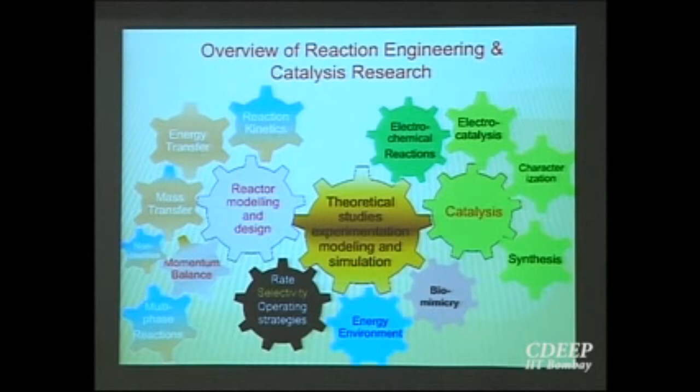So what we will do next is we will quickly go through the dominant themes which are being tackled here, and maybe also pick some examples from elsewhere, and then look at the approach to reaction engineering and catalysis research that is usually followed, and especially so in our department.

So there are homogeneous systems and liquid-liquid systems, and when you consider homogeneous systems, I must mention one thing, that reaction engineering, while I said that it is a unique preserve of chemical engineers and so on and so forth, is often considered as a very mature field because it's been around for hundreds of years, and the basic theory is reasonably well developed, and it only remains to apply that theory to particular cases. Okay, so this is one point of view.

But as we go along, we will see that although in terms of principles there is a certain amount of maturity in the field, there are a lot of unsolved issues when you apply it to specific cases, and therefore the issue does get quite complicated, and there is a lot of research material in this field yet. Okay, for example, even if you take a simple thing like a homogeneous reaction, the situation today is that as far as gas phase reactions are concerned, the understanding is reasonably good, and you also have theoretical tools like density functional theory and so on, which are reasonably successful in predicting the course of reactions, gas phase reactions, simple reactions which do not have a complicated mechanism and so forth.

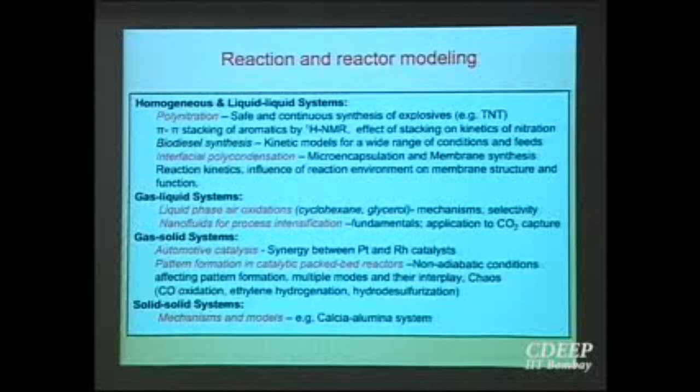I will talk about some of our own work on interfacial polycondensation, which is a reaction that I had occasion to mention the other day when Professor Juvekar gave his lecture on interfaces and interfacial engineering. This is a polymerization reaction. It's a condensation polymerization or a step polymerization reaction that takes place at the interface between two liquid phases. Hence, it is categorized under liquid-liquid systems.

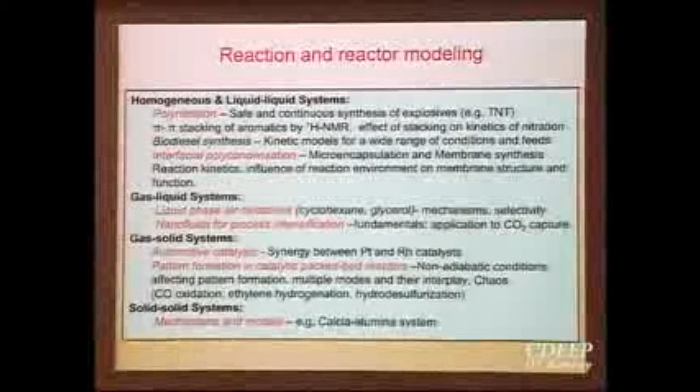And what happens is that each of the liquid phases has one of the monomers. Therefore, the reaction does not occur in the bulk of either phase. The only place where the two monomers can come together and react is the interface, and the reaction product in turn is also insoluble in both the phases. Therefore, it forms a film at the interface, and this spontaneous formation of the film is convenient in producing products such as microcapsules of, let's say, enzymes or pesticides or herbicides.

So the intention might be to contain the product encapsulated, or it may be to release the encapsulated substance to the environment in a controlled and sustained manner. So for either of these situations, you might want to produce capsules, and because you can conduct this reaction at the surface of drops, you'll get the capsules directly. So that is one advantage of these reactions.

The reaction is also used in producing membranes for separation applications, such as reverse osmosis membranes. The dominant type of reverse osmosis membrane chemistry is about polyamides, and the polyamide is formed by this kind of a reaction. It forms a very thin layer, which is a few hundred angstroms thick, on top of a support membrane, and so interfacial polycondensation is the reaction at play here.

So here our interest has been, both in the context of microencapsulation and membrane synthesis, to measure reaction kinetics, which is a problem because the reaction is extremely fast. It is finished in a matter of seconds. So how to monitor these reaction kinetics, and why is it important to measure them? If it is so fast, then why are we worried about it?

It is because kinetics can be influenced by the reaction environment, and kinetics through the reaction environment can influence the membrane structure, and once the membrane structure is influenced, it influences the functional properties such as permeation rate or mechanical strength of these membranes. So these are the issues that we are interested in.

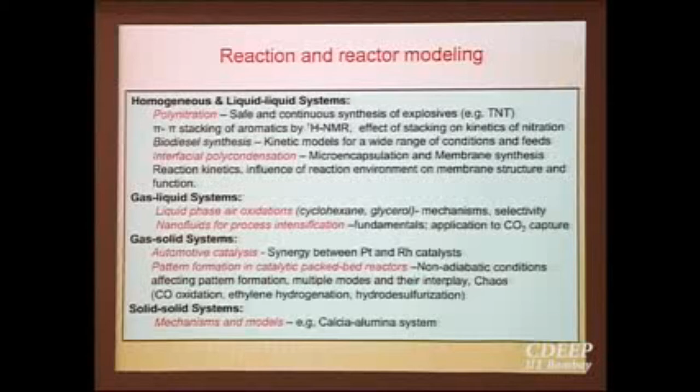Coming to a fourth kind of multi-phase reaction system in which work is going on here, we are investigating certain features of solid-solid reactions. The way in which reactions occur when at least one of the reactants is continuously distributed, such as when one of the reactants is a fluid phase, gas or liquid, is easy to understand, because the molecules are moving about, and in the course of that movement they will find a molecule of the other substance, which may be in the same phase or a different phase, and a reaction will occur. How do reactions occur when both reactants are solids?

There are a number of these kinds of reactions that take place in, for example, the ceramic industry, or even in chemical industries such as cement manufacture, right? So where both the reactants are solids.

So we are trying to look at how these reactions can be analyzed from a macroscopic angle, without worrying too much about how actually molecules move and diffuse and so on and so forth. Can we understand some broad characteristics of these kinds of reactions from a top level kind of an approach? So the candidate systems we are looking at here are calcia-alumina systems, which, as I will explain, have some interesting features for these kinds of applications of theories.

Continuing on the theme of multi-phase reactions, the reaction and reactor modeling uses various kinds of approaches these days. The emergence of this field called computational fluid dynamics modeling has helped the understanding of multi-phase reactions, particularly when you have fluid phases involved, to a great extent. And that is because in any chemical reactor, one of the major ways in which the reaction environment or the reactor influences the behavior of the reaction itself, right, is because of the way in which substances mix, the rate at which substances mix and unmix. And all of this can be analyzed very neatly using computational fluid dynamics tools.

Some years ago, maybe 20-30 years ago, it was very difficult to analyze these kinds of mixing phenomena because, number one, the fluid mechanics equations, the Navier-Stokes equations, which have to be solved, are very, very complicated, nonlinear, and all of that. And added to that, they have to be solved in very complicated geometries. If you take a stirred tank reactor, there is a stirrer and there are baffles, there is the gas inlet, and there is the free surface which itself is not flat, and so on and so forth. So there are a lot of complications in the geometry which have to be handled, and thanks to the advances in computational tools and computational power, we are now able to solve these equations, not exactly, but under some assumptions.

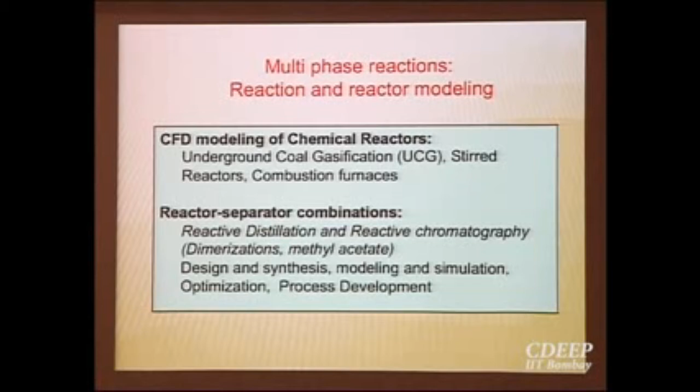Coming to catalysis research, the kind of questions that we ask is, what determines catalyst activity and selectivity? Of course, as I mentioned, there is density functional theory, which tries to explain these from very fundamental quantum mechanical kind of principles, but those kinds of calculations are very complicated, especially for dense systems such as liquids. So we might want to take an experimental route to finding out what makes for a high activity and selectivity of the catalyst. One of the themes that has been emerging in recent years is that the catalyst cluster size has a substantial influence on the catalytic properties of the catalytic substance. For example, till recently gold was not considered a good catalyst.

Gold was considered an inert metal, but recent advances have shown that when you subdivide gold to nanometer clusters, it has very interesting catalytic properties, very selective kind of properties for a number of reaction systems.

So catalyst cluster size effects. And once you have a catalyst, you cannot rest easy that I have found this catalyst and now I can conduct my reaction and make a lot of money, because in order to use this, you have to support the catalyst on some kind of a support which has a high surface area. Silica and alumina you might have seen being used as supports in a number of instances.

The second thing is what influences catalytic reaction pathways. Now this is a very complicated matter, because there are reactions taking place on the catalyst surface, there are reactions taking place in the bulk of the fluid, and each of these, by generating certain kinds of intermediates and consuming them, can influence the other. And so these kinds of external influences, or the influence of other catalysts, whether intentionally added or accidental, become important. And reactive intermediates and their stabilization. So this is basically related to the earlier question of what determines catalytic activity.

Then how do we model catalytic systems? In your reaction engineering courses, you might have come across very simple kinds of models where, whether there is a catalyst or not, you apply power law kinetics, K times Ca to the power alpha, Cb to the power beta type of thing, where the catalyst only influences the magnitude and temperature dependence of the reaction rate constant, K. That is the first level of modeling.

If you want to go deeper, you can derive or postulate a Langmuir-Hinshelwood kind of a mechanism. You can say that the catalyst first complexes with reactant A, produces an active species, which then reacts with another surface species or a species in the bulk, and so on and so forth. You can construct a series of steps and analyze them with the assumption of one of the steps being rate limiting, or the system being in a quasi steady state, and so on.

A more detailed level of modeling is what is called microkinetic modeling, where you talk about all the surface species that are possible, that are suggested by chemistry, and you don't make assumptions like quasi steady state or rate limiting reactions, and so on. You analyze the entire network, but obviously when you do this, there is a horrendous number of rate constants and their activation energies, which if they are not known, there is no point in building such a detailed model, because everything has to be fitted from reaction data.

But fortunately, because of the availability of quantum mechanical calculations these days, at least in some instances, we are able to guess reasonable values of some of these parameters. Therefore, microkinetic modeling becomes feasible. And if we can do all of this in a systematic way, then that can point the way towards efficient catalyst design. The candidate systems in which we look at these kinds of questions are liquid phase oxidations, biodiesel, and so on and so forth.

The third or the fourth area that we look at is the area of, I have grouped a few themes here: complex phenomena, biomimicry, and electrochemical processes. They are all complex in one sense or another, so they all fit under one heading.

When we talk about complex phenomena, this is usually generated in chemical reaction systems because of the nonlinearity of the systems. Nonlinearity arises in two ways: because of the nonlinearity of the kinetics, the nonlinear ways in which the reactions depend on reactant concentrations and product concentrations. After all, first order reactions are more the exception than the rule, right? First orders are the only reactions which are linear.

On the other hand, there is also the nonlinearity that is due to the Arrhenius dependence of reaction rates on temperature. When these kinds of nonlinearities exist, the equations predict that very interesting kinds of behavior from a theoretical viewpoint can arise. From a practical viewpoint also, these are important, because when the system is exhibiting these kinds of behavior, it might show entirely different kinds of selectivity features and rate features, which may be important from a practical point of view.

So we are looking at some of these systems, and as I mentioned earlier, there is a tendency these days to look at biology when we are stuck for an answer, right? After all, nature has been at it for millions of years, and it has found things that we are still struggling to learn. Therefore, modeling biological networks in order to understand how signaling takes place, how control of reaction pathways happens there, how the very complicated networks are regulated and conducted in a very coherent manner. So these are important issues that we can learn from nature.

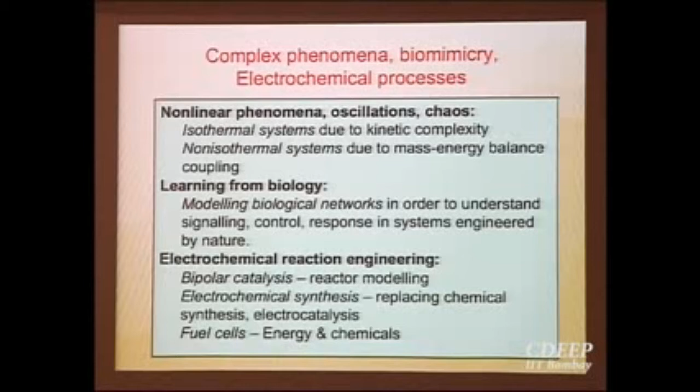Electrochemical reaction engineering, I mentioned that it's a very attractive alternative to heating the reaction mixture to a high temperature, for example, or finding a very efficient catalyst, because one of the ways in which you can tune reactions is to conduct them at a certain definite potential, so you can drive certain reactions while leaving the other reactions alone. So you can derive interesting selectivity features. I will talk a little bit about bipolar catalysis and electrochemical synthesis in the next few slides.

Okay, so in the next few slides I will try to illustrate the kind of approaches that we take in reaction engineering research on all of the themes that we went through in the earlier slides. Often, the research proceeds as in the case of, you might have heard the story of blind men trying to understand the shape of an elephant. One fellow touches the stomach of the elephant and he comes to a certain impression. One touches the legs and comes to a different impression.

What is important about this is that in the last 10 or 15 years, a lot of literature has accumulated which says that these nanofluids have properties which are very different, number one from the base fluid in which the nanoparticles are suspended, and number two from what is predicted by theories available for predicting the properties of suspensions from the properties of the individual components. So those theories don't seem to work. We observed this in the case of mass transfer, where we found that the mass transfer rates in suspensions are much higher as compared to the mass transfer rates in base solvents.

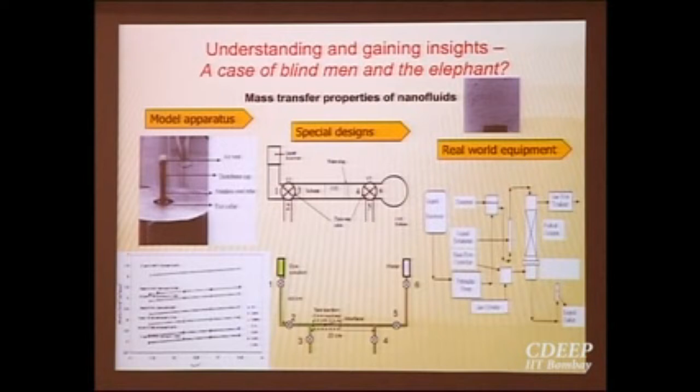The other factor that is important is the influence of scale at which you apply your reaction engineering principles. I talked about the influence of pi stack.

So I mentioned the occurrence of pi stacking in aromatic systems and how this influences the rates of a reaction such as nitration. What we are essentially saying is that when you have aromatic molecules, they can sit on top of one another, something like a polymerization, but this is what is called stacking, so that the pi electrons can move continuously across different molecules, and this confers some kind of stability.

Now aromatic molecules are stable because of the resonance stabilization of the bonding electrons, but this confers a higher degree of stability on the aromatic molecules, so they become even less reactive, so the rates of reaction are not very high. On the other hand, if you study the phenomenon carefully, there is a kinetics to the stacking. There is a rate at which the stacking takes place. Now if you can get the molecules to react before they stack up, maybe you can derive benefits in terms of rates.

That stacking is taking place can be analyzed in terms of proton NMR, as I said, and it also manifests itself in terms of large increases in solubility of the aromatic when the stacking phenomenon takes place. So how do we conduct a reaction? How do we mix the nitrating mixture with the aromatic faster than the stacking kinetics? We can do this in, for example, something like a stop flow reactor, and this is a micro reactor which allows us to do that.

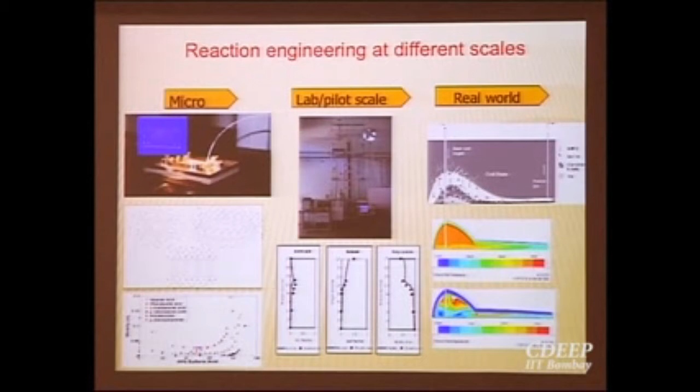Another issue that often becomes important is, while large scale manufacture is strongly dependent on steady state behavior of reactors, there are interesting kinds of dynamic behavior which might have important consequences on the operability or the safety of operation of these kinds of reactor systems.

So what is shown here is a continuous reactive distillation system, where of course there is a catalytic system that is responsible for the reaction and so on, but in the study overall, one is interested in the steady state behavior of this. But these kinds of catalytic packed beds have their own idiosyncrasies, have their own nonlinearities, which can affect the overall performance of the system in various ways.

So I have a video here from Professor Ganesh Viswanathan's work, which shows that in a catalytic packed bed, because of the nonlinear interaction between the mass balance and energy balance that occurs, you have patterns developing.

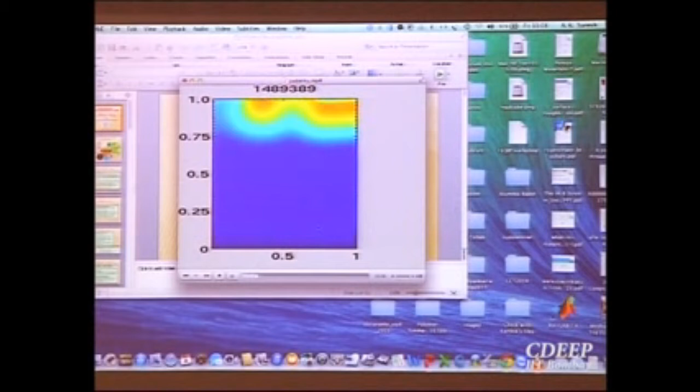So if you see that video, what is being shown here is a packed bed, in which the flow is in that direction from bottom to top, and what you see developing are hot temperature zones, hot zones, which travel through the reactor and exit. Of course, this is not something that you can poke thermometers all over the bed and measure. What you actually measure is the mixed cup concentration at the top, and that hides a lot of features.

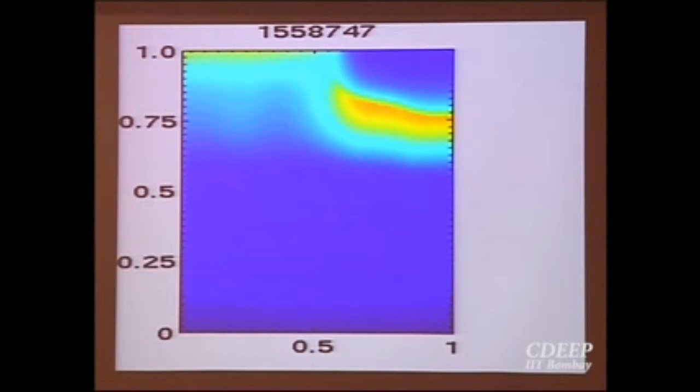Okay, there is a lot that is happening here. You may have hot zones developing in the interior of the reactor, which might sinter the catalyst, which might deactivate the catalyst, and so on and so forth. So the reactor will not give you the performance that you expect it to give.

So catalysis, in some sense, is the holy grail of reaction engineering. Everybody wants a catalyst that does wonders to your rate and selectivity. And as I mentioned a few slides ago, it is not something that we can design from first principles yet. Unfortunately, except in very simple cases, given a reaction, we are not able to immediately identify which element in the periodic table is best suited to catalyze that reaction.

We depend on earlier experience, knowledge that has been gained over the years for similar kinds of reactions and so on, and we shortlist a set of compounds, a set of materials, which we test and then narrow down the list of elements, and then there is the whole issue of supporting this and then making the catalyst in a form that can be used in an industrial reactor. Then there are the issues of support interactions and so on, right?

So catalyst synthesis is an important area which is very much of an art. Okay, you have to mix the ingredients in a certain manner under a certain set of conditions, and there are a lot of things that can happen which can have a significant influence on the catalytic activity.

For example, what is the size of the metallic clusters, how are they distributed, what is the porosity, what is the percentage of porosity that is hidden in micropores, which are nanometer size and which may pose diffusion limitations for the reactant molecules. All of these things are determined by the way in which the catalyst is synthesized.

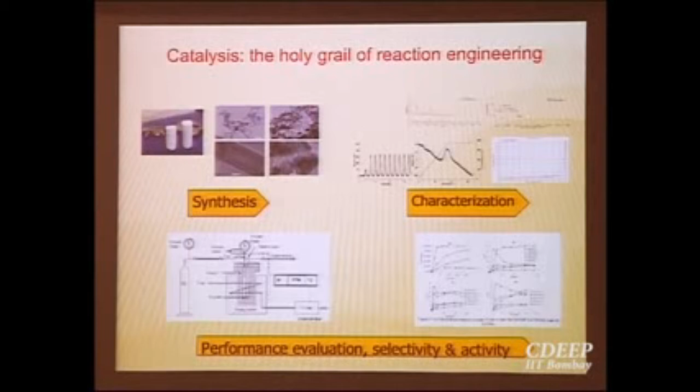So maybe I'll fast forward a bit. Okay, so I'll talk briefly about this, but more information you can ask from Professor Ganesh if you are interested, because this is part of his work.

So as I said, when we are confronted with even a simple network, it seems very complicated to us, but nature seems to carry on very complicated reactions in networks in the space of micronic dimensions of a cell very, very efficiently. So there's maybe a lot we can learn from how nature does this. Two particular instances of this from Professor Ganesh's work are illustrated here.

Now, often you want a switch-like response to a signal, right? So it's either on or off. That kind of a response is what is needed, not a gradual build-up of the response. Now this seems to be very characteristic of enzymatic cascades or biological systems, and earlier research has shown that stacking of these kinds of modules is what is behind these switch-like responses.

Now what is happening here is that there is an enzyme which phosphorylates a chemical X to its phosphorylated or active equivalent X star. X star can be regarded as the active form of X, and this X star itself is an enzyme which catalyzes the transformation of an inactive molecule Y to an active molecule Y star, and then the dephosphorylation or inactivation of these X star and Y star is catalyzed by other enzymes P1 and P2.

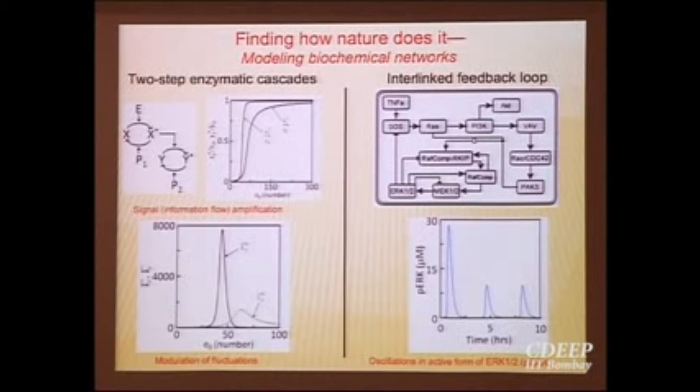Now, okay, I will not talk about this for want of time, but this is again an instance of interlinked feedback loops which deliver certain kinds of interesting features such as oscillatory phenomena and so on. I will skip this. Okay, the general theme I want to illustrate in the next couple of slides is that there are some very traditional themes that you would have come across in your reaction engineering courses also.

When rate processes take place in series, we know that the slowest rate controls, right? So we talk about the rate limiting step and so on. So a general theme that runs through much of reaction engineering is that of diffusion and reaction. Okay, so these may be taking place in parallel simultaneously, or diffusion may be followed by reaction or whatever, right?

Now this is a very old thing. There are results on diffusion reaction which date back maybe about 100 years or so. But even today you can come across instances of where this principle is at work. Okay, so that is why the quote there is from Macbeth. Some of you might recognize it.

So you would not normally expect such an old theme to have relevance even today, but then it has a lot of stuff in it. So we have seen in complex oxidations such as cyclohexane that under some circumstances where mass transfer starts to influence, this is a reaction in which the reaction gradually speeds up as the products accumulate. So there is an autocatalysis that is involved.

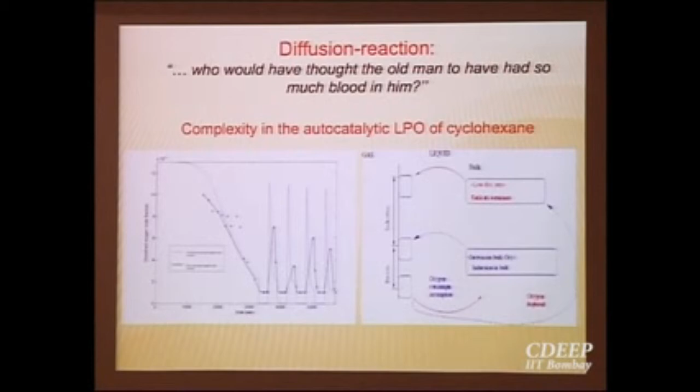Now this is an isothermal case, and there is no coupling between the energy balance and the mass balance that is invoked, for example, when you analyze the multiplicity of steady states and stability of steady states in a non-isothermal CSTR in your reaction engineering courses. So we try to understand this through a mechanism that invokes this paradigm of diffusion and reaction. Okay, so I will not go into the details, but it shows the relevance of some of the traditional themes in present day instances.

I'll just give one example of a situation which is very common in industry, but on which not much theoretical work exists. This is a case where both of the reactants are solids. Normally, you know the situation where a solid particle is surrounded by a gaseous or a liquid reactant. So you have the shrinking core type of models, where you could have gas film controlled situations, reaction controlled situations, ash film controlled situations. You would have seen all that.

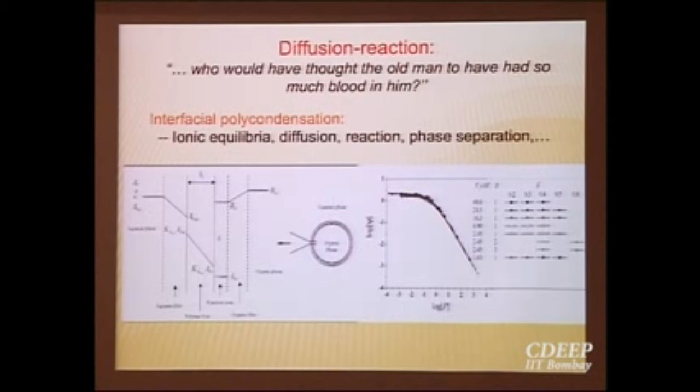So we'll skip this. How much time do I have? Another 5 minutes. Okay, so we'll skip this.

Yeah, so I mentioned electrochemistry. Under several circumstances, mixing electricity and chemistry could have advantages, because you can tune reactions by controlling the potential and drive certain reactions to the detriment of other reactions, improve selectivity, and so on. There are also devices like fuel cells for generation of electricity and batteries for storage of electricity, which are very important in today's context. And we are also looking at electrosynthesis and electrooxidation.

Now one of the themes that Professor Arindam Sarkar's group looks at is oxidation chemistry in a fuel cell: you take a substance and oxidize it all the way to carbon dioxide, and in the process generate some electricity. Instead of oxidizing it all the way to carbon dioxide, can you partially oxidize it so that you get some electricity but also valuable chemicals? So simultaneous synthesis of energy and chemicals is a theme that is being studied here.

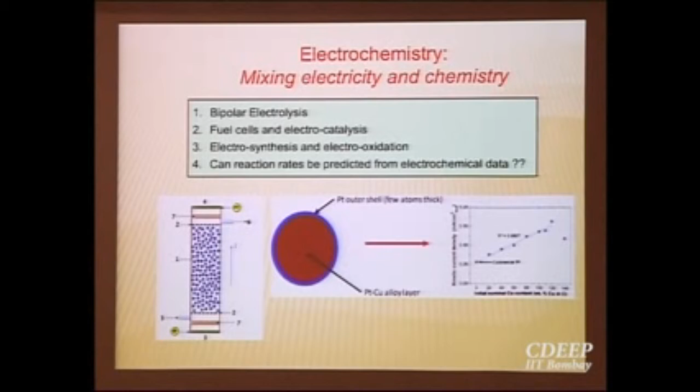I don't know, have they already had a tour of the lab? So you might have seen some of these equipment actually.

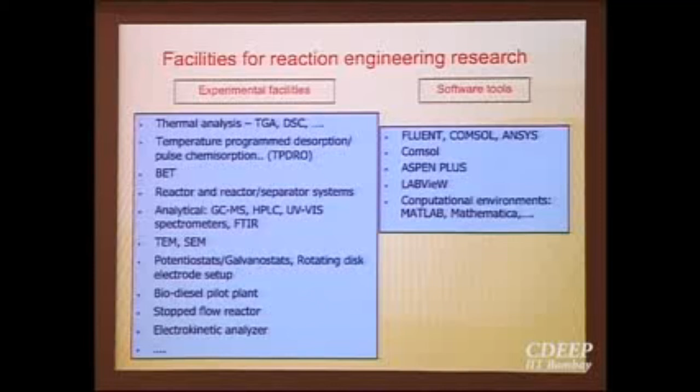Then on an even larger scale, if you want to conduct the reactions and look at the process development possibilities, we have a biodiesel pilot plant operated by Professor Mahajani's group, where a variety of feedstocks are converted to biodiesel and the kinetics at a reasonable scale are studied. And then you of course require software tools. Apart from a variety of open source software, we also have proprietary software such as Fluent, COMSOL, etc., which allow you to do CFD type of work. And MATLAB is a very general computational platform on which a variety of computational work can be done.

Now kinetic models, how complex to make them? When you look at some of these examples that I have given, for example underground coal gasification, there is a whole host of reactions taking place, or when you look at automotive catalysis in detail in a microkinetic framework, there are so many reaction intermediates, so many molecular species, etc. If you make the reaction system too complicated, you might have a realistic system, but you know nothing about the parameters, and somebody said that with 5 parameters you can easily fit an elephant, right? So it doesn't work, because you cannot have confidence in a model of that kind. Therefore this issue of the complexity that you can handle in terms of the data that you can collect is an important one to consider.

In handling complex reaction networks, the way in which we analyze these kinds of networks, the way in which we study and learn from the architecture of these networks, can we learn from biology?

So people say that coal and clean, these two words cannot be mentioned in the same sentence, because coal is by nature dirty. But then how to do this so that the environmental impact is mitigated to whatever extent it can be. Okay, so there's a whole alphabet soup of techniques that people are looking at. Underground coal gasification is something that I mentioned. There is an emphasis on carbon capture and storage, because there is a lot of interest in reducing the carbon dioxide outgress into the environment and so on. I've given some examples of putting electrochemistry to work.

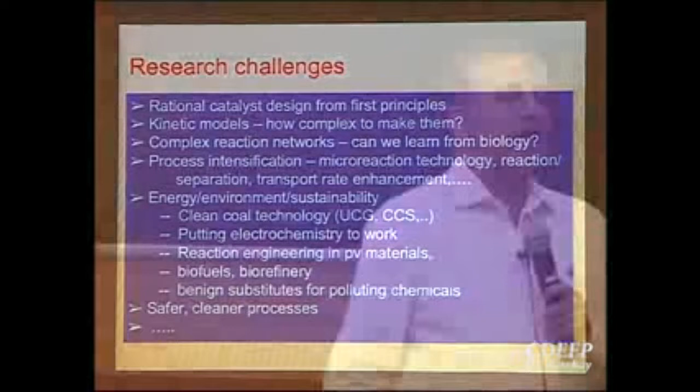Now there are a lot of areas in which chemical reaction engineering can play a part. It is playing a part, but in my opinion not to the extent that it can. So for example, in photovoltaic materials and other electronic materials, there is a lot of reaction engineering that goes on, but chemical engineers don't as a rule look at these kinds of systems. There is a lot of potential to improve the engineering of these kinds of processes.

Biofuels, biorefinery, once again, I mentioned photovoltaic materials in the context of energy, what role chemical reaction engineering can play in energy related material synthesis, and biofuels, biorefinery also in the same context, and benign substitutes for polluting chemicals. We have had a number of examples. For example, lead was taken out of petrol and then MTBE was put in, then MTBE had its own problems, now that has been taken out.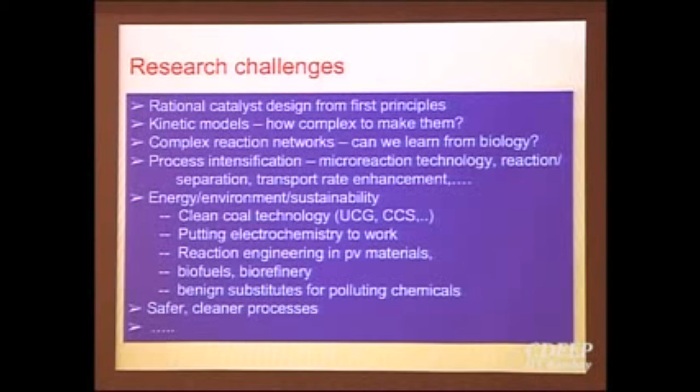So replacing polluting chemicals in the refrigerating industry, we had CFCs, okay, chlorofluorocarbons, which have now gone out of fashion. So all of these kinds of themes in the interest of sustainability and environment, and the general drive towards safer, cleaner processes, reducing the wastage, zero discharge kind of processes, and so on. Okay, so these are some of the research challenges that I might mention.

So just to conclude, I think I have taken a lot of time. Reaction engineering continues to be an exciting field with a number of challenges, and as I said, chemical engineers are uniquely placed to play a part in it, because a systematic study of chemical reaction engineering is only found in a chemical engineering curriculum, in no other engineering curriculum. CRE has yet to realize its full potential in terms of the difference it can make to non-chemical engineering areas such as energy, electronics. I mentioned some examples, but there are a number of instances where principles of reaction engineering can give you insights that you cannot otherwise get.

The traditional driving forces for rate and selectivity are being shaped by the current emphasis on energy efficiency, cleaner processes, sustainable strategies, and so on. Now, traditional areas and methods of analysis continue to yield rich dividends. While there is all this diversification going on, chemical engineers getting into other areas, you still recall some of the undergraduate level material that you have studied, diffusion reaction, Thiele modulus, effectiveness factor. So these things can still give you a lot of insights in these newer areas.

At the same time, hybridization of ideas from other fields has rich potential. So on the one hand, you have the foundation from your undergraduate and postgraduate studies on which you stand, but then you get into electrochemistry, for example. There is a whole new domain of knowledge to imbibe from. You get into catalysis, the chemistry of catalysts, or you get into electronics, materials. So the other domain knowledge also has to seep in, hybridize with the knowledge that you already have in your basic chemical reaction engineering, and only then you can make differences to the field in which you work.

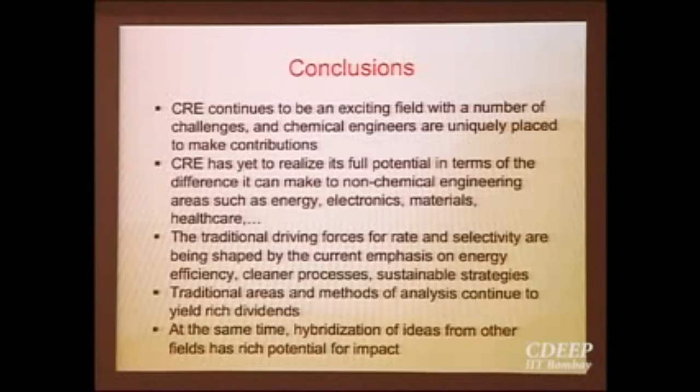So Professor Sarkar and Juvekar work on electrochemical systems. Professor Juvekar and Mahajani work on polynitrations and that class of reactions. And Professor Vishwanathan works in complexity in biological systems as well as in chemical engineering systems. So that's the field of reaction engineering as represented in our department largely. Okay.

So, in fact, you will see on the right side picture here, there's the concentration of phospho-ERK. P stands for phosphorylation event, and ERK is the protein which is responsible for proliferation of cells. Proliferation means the cells are actually uncontrollably dividing. So ERK is known to be one of the proteins which actually controls the uncontrollable division, and as a result of which the cancer progression is significant.

So here you can see that it actually undergoes an oscillatory behavior where the concentration goes up and goes down, which means that it sort of reflects the transient with which the cancer cells are behaving. So the question here would be, if the cells are treated with a certain drug, can we suppress the concentration of phospho-ERK by looking at the dynamics of the network? So that's the grand question.

So if we can suppress it, then we actually stop the cells from dividing uncontrollably, and so we arrest the progression of cancer. So that's basically the objective, and the network that you see is just a miniaturized version of a large network. The large network in this particular problem has about 350 species and about 400 interactions. But this just captures a tiny part of it, which is known to be responsible for an important aspect, which is the proliferation of the cells. So that's basically the quick summary of the right-hand side.

And in fact, what you see here on the left-hand side is actually a small component of the network that you see on the right. Is there a pointer somewhere?

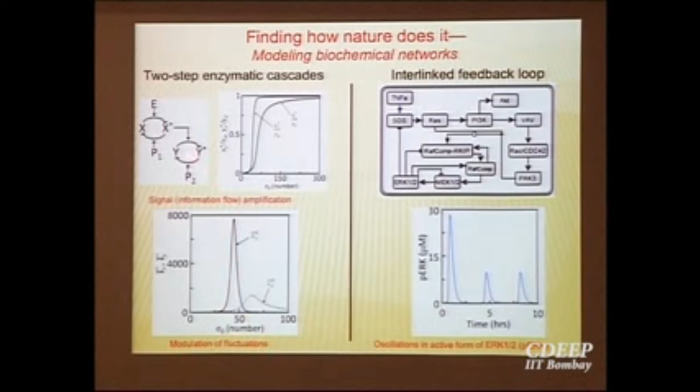You see, this MEK and ERK is basically two proteins which go from inactive to active form, and it's actually an enzymatic cascade. And what you see here is basically a larger version of all the details of biochemistry that happens inside here. So this kind of amplification actually happens in different sections of the network, and there are feedback loops which are present here. So they modulate the response, and so the question is how the feedback loop is modulating, and can we attempt to tamper with the feedback loop?

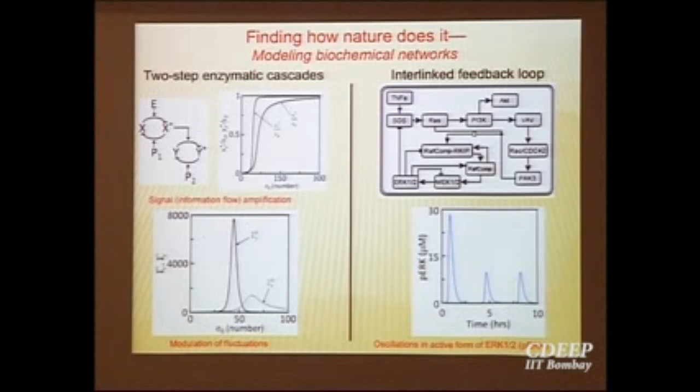There are ways to tamper with the feedback loops. Can we tamper with the feedback loops and eventually control the concentration of the active form of ERK? So that's the grander question. I mean, if you have any questions, I'll be happy to answer. Yeah. Yeah, so you can.

Yeah, I mean, these are questions that can be easily verified using some very simple experiments. For example, in heat transfer or mass transport, by analogies we know that the mass transport coefficient and the heat transport coefficient are a strong function of the hydrodynamic conditions. So we can actually play with the flow rate, and by that way you can actually control the mass transport rate. And then you measure the concentration or the rate at which the reaction is happening. You will be able to figure out whether it is mass transport or diffusion control. That's a very easy experiment to do.

Yeah. Right. See, with respect to deciding whether it is internal diffusion control or mass transport control, this is particularly with reference to heterogeneous catalysis. You can simply increase the temperature. If you increase the temperature, you increase the diffusivity significantly, and so you will be able to figure out whether the reaction is happening at the intrinsic kinetics or the kinetics is falsified. And you conduct at normal temperature, you will be able to compare that and figure out whether it is diffusion controlled or not.